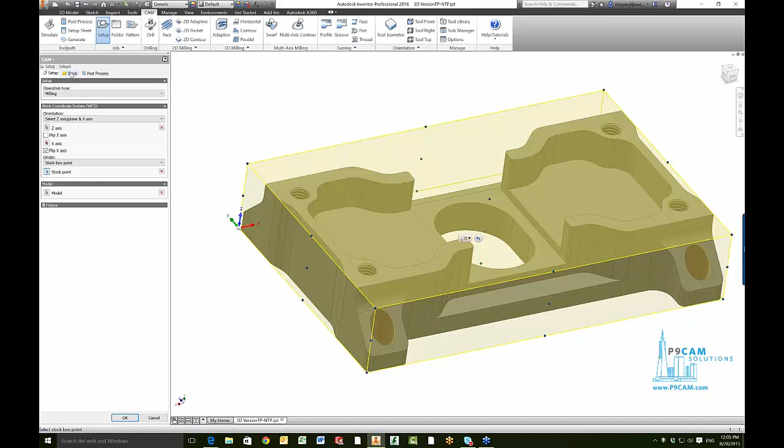But we want to set up our stock. I like how Inventor sets this up where it usually defaults to a fixed size box, and then puts in the values of the minimum size that you need. I usually write these down on a post-it, and then I'll walk out to my shop to see what the next bigger piece is that I have.

So let's assume for today we have a 6-inch by 4-inch bar stock. Or let's say 4 by 1.5-inch bar stock, and we're going to cut it to 6 inches long. And then I want to hold on to the bottom with, let's say, some Mitee-Bite Talon, little vice jaws. So I'm going to offset it to the negative direction by 100 thousandths. Those Talons need about 65, 70 thousandths to hold on to.

In the post-process tab, this is where you would name the program number, and I'm going to put in 'first op' for the first operation - that's just a comment that's going to output. Then I'm going to leave my work coordinate system output to 0. So 0 and 1 equals G54, like on a Haas machine. 2 is going to be 55, and so on and so on.

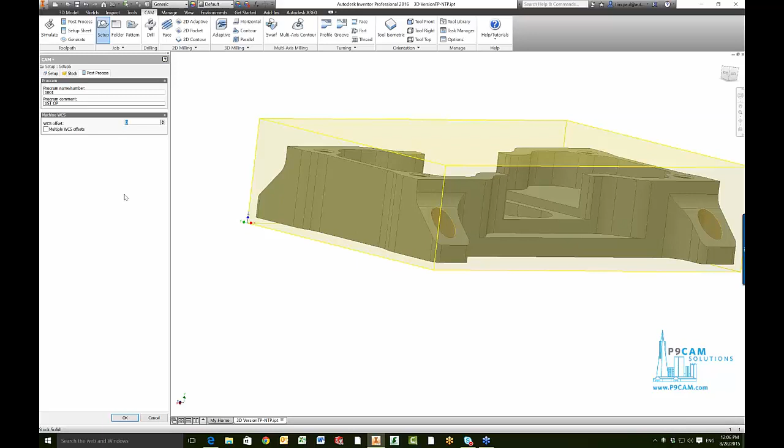So right now we're ready to start adding toolpaths. You can see the representation of the stock and then the model. Always remember that the intelligence of our software is to look at what you want when you're all done and then try to remove the stock that you define. So we define the stock, then define the model, and hopefully all we end up with at the end of the day is the model.

To talk through the setup or operations, generally I'm going to start with making a face operation on this, and then normally I would go in and rough it after that. But with this part, I want to drill these holes so the location is good before I rough it out, so I'm not drilling on an angle. So I'm going to face it.

I think I'm going to drill these holes, and then we'll just start attacking it from there. Quick disclaimer, I haven't spent much time on prep for this, so you might get to experience me working through the part as we would in the shop. Sorry if we get hung up on anything.

The first thing I'm going to do is use my right-click selections in this gray space. I think it's a little more efficient than coming up and grabbing it out of the ribbon up here. So I'm going to go New Operation, 2D Milling, then Face Mill.

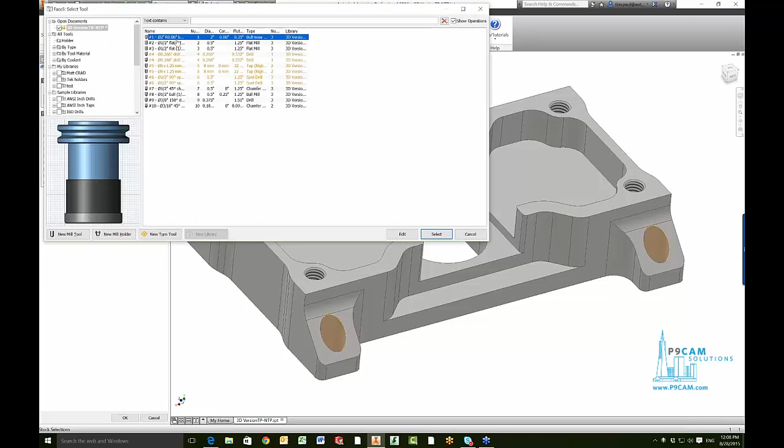We have our five tabs here. I'm going to go to Tools, go through my tools, and grab this Face Mill. Hopefully I should be able to hit OK, nothing blows up on us, and we get a toolpath we like.

So there we go, we got a roughing pass, actually two roughing passes and a finish pass, which is exactly what I wanted. If your default facing operation doesn't look like that, you can go into these tabs, your Heights tab, your Passes tab, and set all these things. We'll walk through that in a bit.

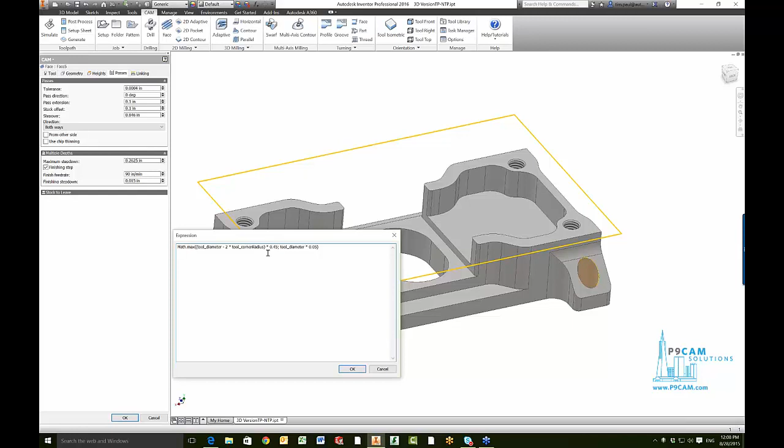An example would be your step over. You can go edit that expression and set it to 45% of the tool diameter. So you set all these things up the way you want, and if it's the type of operation you'll do most in your shop, you right-click on it and make that your default. Then next time you go to face something, it's going to face it the way you set your defaults.

Quick note on templates: a good use of a template is if most of what you do is face aluminum, maybe set up all your defaults for that. Then if you want a special template for cutting steel, you just edit all those settings and store something as your template.

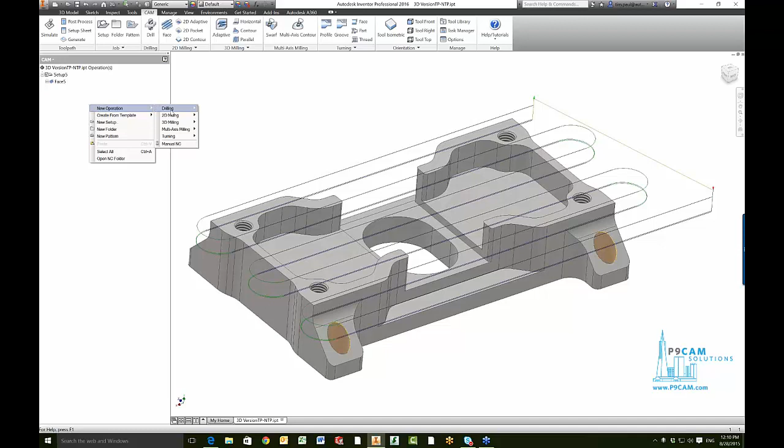So we have a facing operation, and now I want to drill these holes. I'm going to right-click and go New Operation, then Drilling, and go back into our tools. I already looked to see what size those holes were, and they're 375.

I'll click on that, and then we don't have to go to the Geometry tab, we can just grab the geometry right out of here and it'll jump to the Geometry tab. So instead of having to click around all the holes, we could check this box here where it says Select Same Diameter, and that'll run around and grab all the other ones with the same diameter.

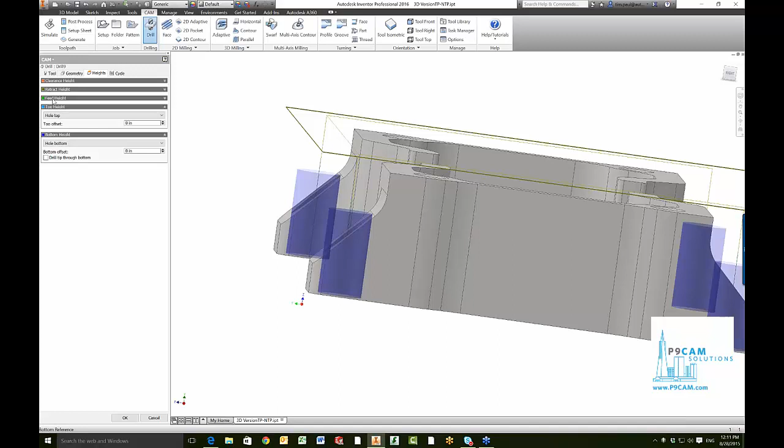Something important to notice is it's rapiding down to here, and then it's going to start drilling, because the default for the heights is that the top, where the cut starts, is set to the top of the hole. We want to change that to be the model top, so now it's going to start drilling at the top of the model because we already faced it down to that surface.

The other thing I want to do is turn on this drill tip through bottom, so it'll take the drill angle and drill tip into consideration, giving you a full diameter in that hole. I also want to drill past that by 30 thousandths of an inch.

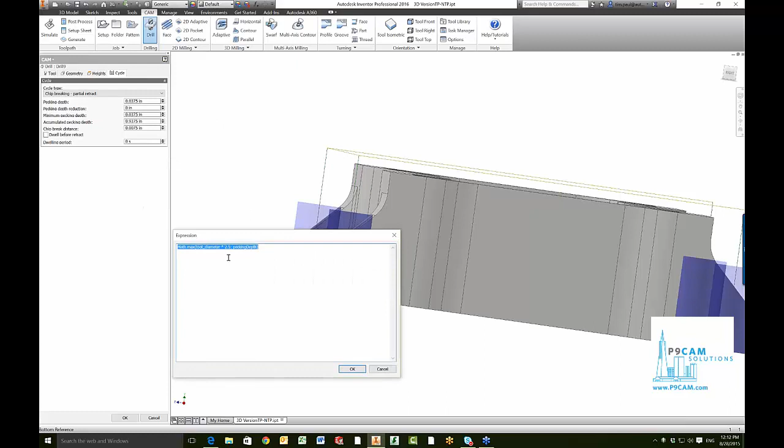Going to the Cycles tab, I really like this chip breaking cycle - it'll take small pecks, but only partially retracting to break the chip, and keep going in. This accumulated peck depth is an awesome tool too - if you look at the expression, it'll take small pecks until it gets to 2.5 times the diameter of the tool, then pulls out, removes the chips, and goes back in.

So there we have our drilling operation, and you can see, like I was saying before, you're not rapiding down here, it starts up there.

So now I want to rough the part. I like to use our 3D adaptive as often as possible. A lot of people look at this part and don't really think it's a 3D part, or a part similar to this, but pretty much everything we make is three-dimensional. So it's going to look at how it can rough the entire part with one tool. So turn on this adaptive, go back into the tools, and I think this half-inch tool right here will work.

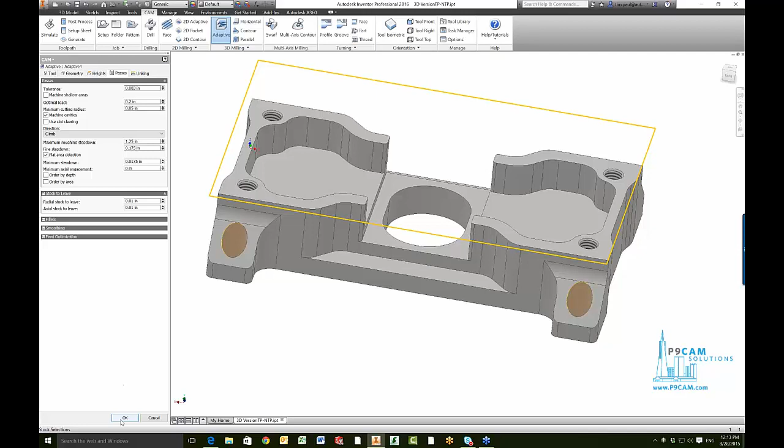So we shouldn't have to make any geometry selections. I do want to make sure that I cut past the bottom, so I'm going to say like 20 thousandths past the bottom. I'll type in negative 20 thousandths from the model bottom. I want to make sure the top of the cut starts at the model top, and it's already set up that way. Looking at the passes tab, I shouldn't have to change anything. So I'm going to hit OK. If I don't like something, we can always go back in there and edit it.

So at this point, before I get too far, am I running ahead of anybody, or does anybody have any questions? Okay. Well, I'll keep talking until somebody stops me.

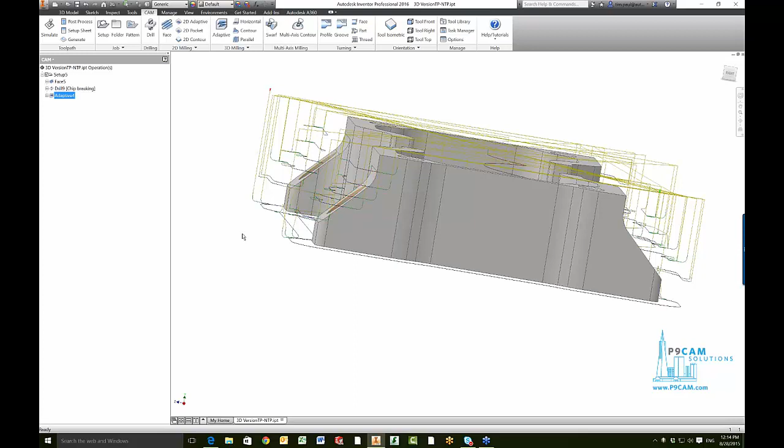So right now, it calculated that adaptive toolpath. If you can see, it looks inside and outside the part, and it helixed all the way to that bore. It roughed all these open pockets, and it even made these step-down passes on these feet, or these little angled areas here. So now we can go in later with a ball mill and get that in one setup instead of having to turn it up on its side and side mill it.

Sorry I didn't do any more prep on this. I just want to think through the part as I would be doing it in the shop. So right now I would probably simulate it, get a feel for where I'm at.

Always when you're simulating, I turn off toolpaths, turn on stock, and most of what I care about is making sure my tool's not colliding with anything. So I turn on stop on collisions. Maybe we picked a tool that didn't have a long enough flute and it'll stop there, or maybe we didn't have the tool hanging out far enough and the tool holder crashes into something. I usually don't spend much time watching the toolpaths move around, so I'll speed it up. Mostly what I'm looking for is an alarm that pops up saying, hey, you got a crash.

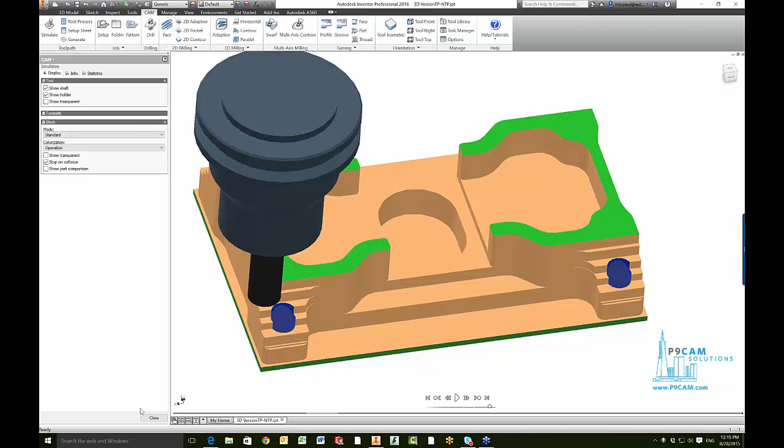Next thing I do is look around the part, make sure it's what I was intending. And this is what I intended. I knew this was going to still be roughed out, but I wanted the whole part roughed out, and the only thing that's finished is this top surface here because we had a finish pass on that facing operation. So that looks good to me. Now I want to go in and finish, because in our adaptive toolpath, on the passes tab, we had stock to leave turned on. So we left 10 thousandths radial and 10 thousandths axial stock to leave.

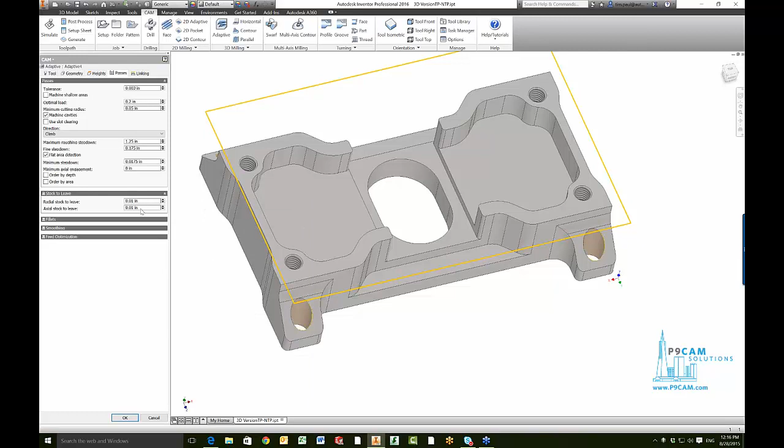So now I want to finish the floors and I want to finish the walls. Now we have a lot of surfaces. We have these surfaces to finish on the floors, and we have all these walls to finish too. There's always a few ways to do anything. If we look at new operation, 3D milling, we could use this horizontal toolpath, which is a really awesome toolpath.

Actually, looking at the time, I think we have some time to just show you what that toolpath is. It's not the final toolpath I'm going to use, but we should actually just be able to hit OK. What this will do is go in and finish all your horizontal surfaces really efficiently. And that's a good toolpath. You can see it took just a few mouse clicks and you got all these horizontal surfaces finished. We could raise up the top definition and also finish the top here.

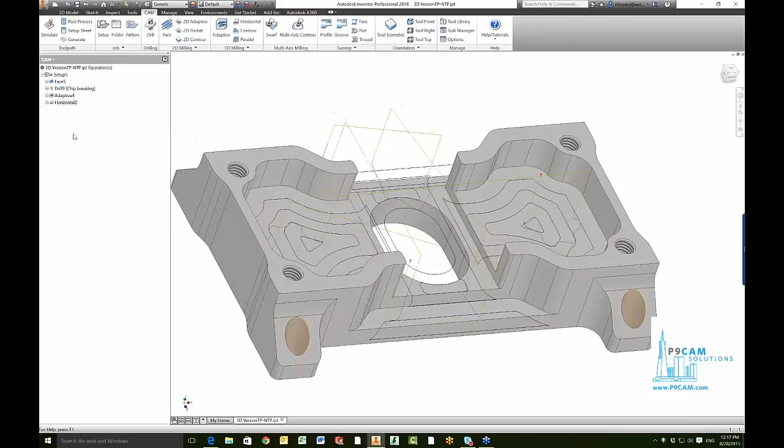The only thing to remember with that is that the walls are not finished with cutter compensation. So if you want to change the dimensions on this with cutter compensation, you won't be able to do that with horizontal. So we have a really good tool in 2D milling, 2D pocket. I'm going to select the 2D pocket, and I want to use the same half-inch tool.

And I'm going to just run around and grab all these horizontal surfaces. Make sure I grabbed everything. Yeah, so I grabbed all these horizontal surfaces, and what I'm going to be able to do there is if you look at the passes tab, we have a finishing pass, and we have wear compensation turned on. So we have no stock to leave turned on. So what this is going to do is it's going to give us a floor finish and a wall finish on all those surfaces.

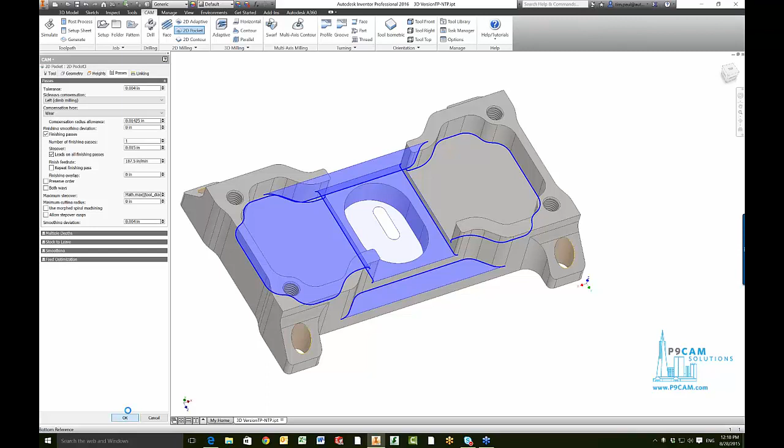If you look at maximum step over, we can look at the expression on that by right-clicking in that white window and look at the expression. So the tool is going to step over 45% of the tool while it's roughing or finish machining all those horizontal surfaces. Let's give that a second to calculate, and you can see pretty efficiently you can finish the floors and the walls on all those features with just a handful of mouse clicks. So it's an awesome tool. I loved it when I found it. So I hope you guys can use that too.

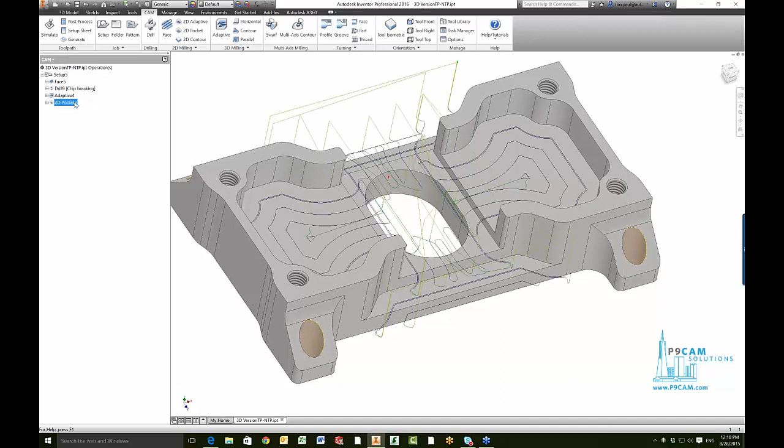So the next thing I think I want to do is I want to finish the walls on this bore and probably on the profile of the part. So I'm going to right-click in the space, new operation, 2D milling, and I'm going to use a 2D contour for this. So it defaults to the same tool I've been using, which is what I want to use. I'm going to select this outside line to get the profile, and I'll select this line here to get the inner profile.

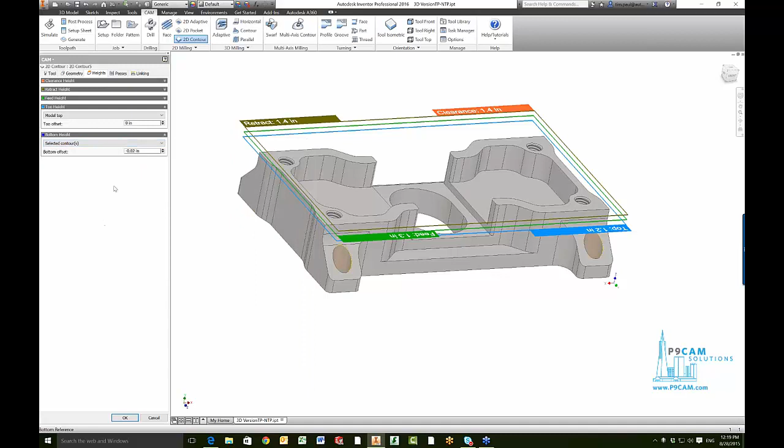So I'm going to go to my Heights tab, and I want to go 10 thou below the contour. So because we selected a contour, it defaulted to this. I could also say to the model bottom minus 10 thou, but in this case it's the same thing. If I go to the passes tab, my wear compensation is turned on, so we're ready to go on that. So just kind of spin it around, make sure the toolpath is what I want, and it is. So I got a finish pass around the outside and a finish pass on that bore.

So I think let's do a 3D toolpath on these feet here. I think that's what we'll do next. So normally I would save it here, but let's get in. So I'm going to right click here, new operation, 3D milling. So you have a lot of toolpaths to choose from. I think what I'm going to use here is a scallop. So bear with me if we end up having to make some adjustments on this, but you'll kind of see how I would think through the operation. So the first thing I want to do is grab a ball mill. So I have this half-inch ball mill that I think will work for that.

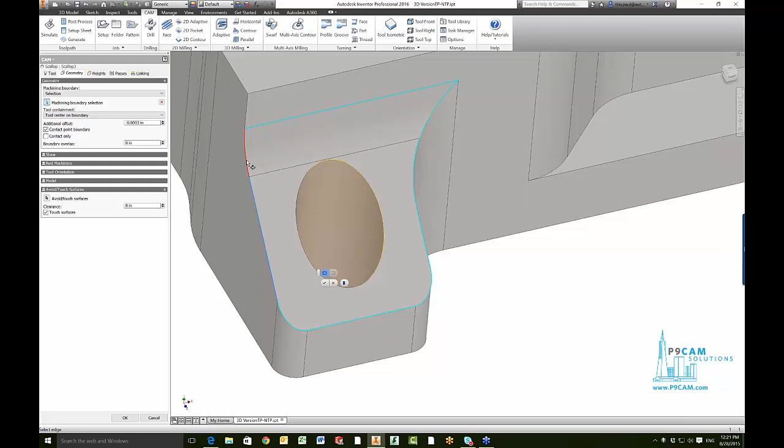Next thing we're going to do is go to geometry selection. So I want to set a machining boundary to this area here. And if that works, then I'll go around and do it everywhere. So it's kind of an important detail. I'm going to zoom in. So when you just hover over this, it's not really the whole area that I want. So if you click on it and then click on it again, it opens up this option here. So now you can go hover over this, and I was lucky enough to where it went to where I wanted. Sometimes you do find that you have to chase it around, but there's some intelligence there. So that was easy enough.

I'm just going to do it on all of them. So click here, click again, and then come up here. So click here, click again, click there, hit OK. So click here, click again, come up here and hit OK. Try it here, click again, come up and click there and hit OK.

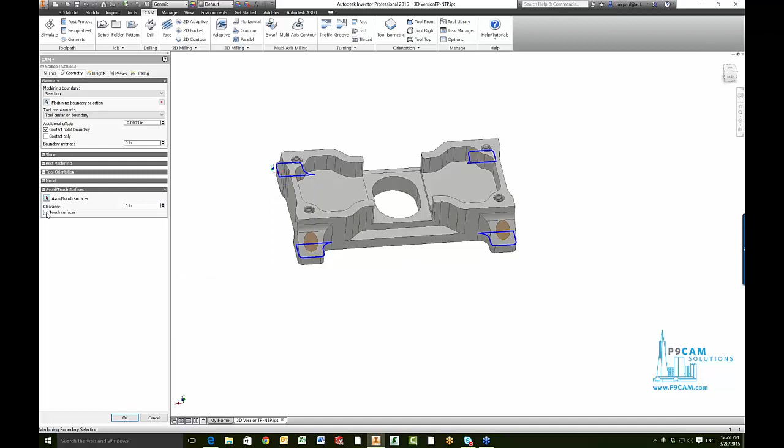So the next thing you want to do is if you go into this avoid/touch surfaces area, I'm going to turn on touch surfaces and make that 0. Now I want to say, now come in and touch these surfaces. These are what I actually want to machine.

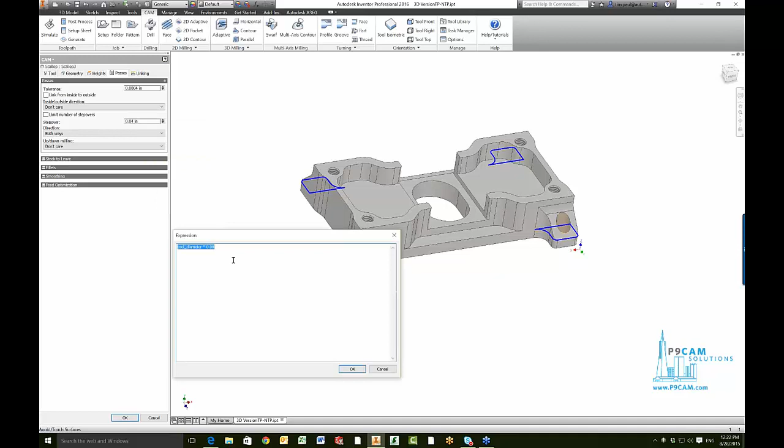Check out our passes tab. Our step over is 8% of the tool diameter. I'll leave that for now. We can edit it later if we want to change the tool path. That's pretty much exactly what I wanted to happen right there.

Cool. So we'll move on to, let's say, drill and tap these holes. I think we're doing good on time to where we'll be able to get over to the back side of this and maybe even do some blind chamfers here. So this is where I use a template. So generally I tap all my holes the same. I might have some different feeds and speeds for steel versus aluminum, but I'm going to use a template.

So pretty much the only prep I did on this part was make sure I had a template for an M8 hole. So this is an M8 threaded hole. So I went in and made a template. So I'm going to show you how to use the template, and I'll kind of go back through and show you how I saved the template. So I'm going to right click in this space and create from template, and then come down to M8, and this is how I label it, but you can label it different ways.

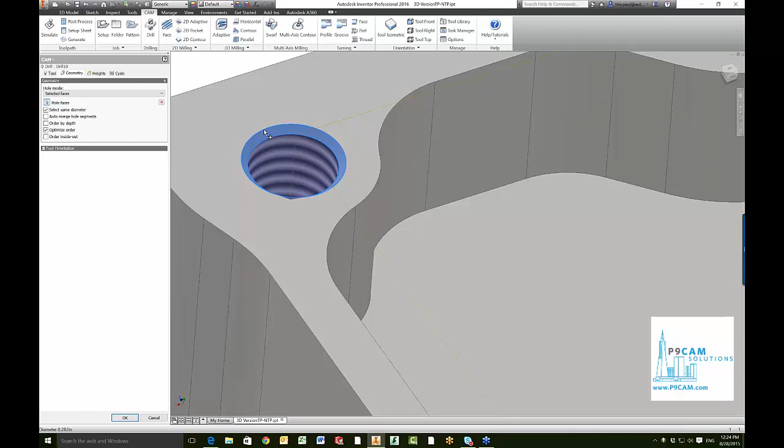And an important note there is if this was modeled at a 90-degree chamfer, if you use, say, a 120-degree spot drill, it's still going to take that 120-degree spot drill and satisfy the major diameter of your countersink hole there. So keep that in mind. It's a pretty neat trick if you don't have to do any math to get the right chamfer diameter. So I'm going to hit OK there.

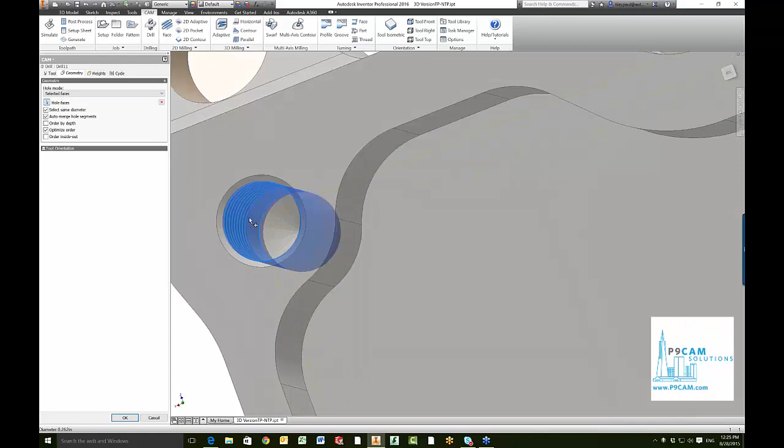And then I'm just going to go select the geometry for these next 2. So for this, I'm going to select the wall. I'm going to make sure I have auto merge hole segments. So if you look down on the bottom of this, it's threaded to here, and then it's pre-drilled, and it also has this chamfer here. If you auto merge the hole segments, it puts them all together. So that's an important little tip. And then it was already set up to select all the same hole diameters. So we're going to hit OK there.

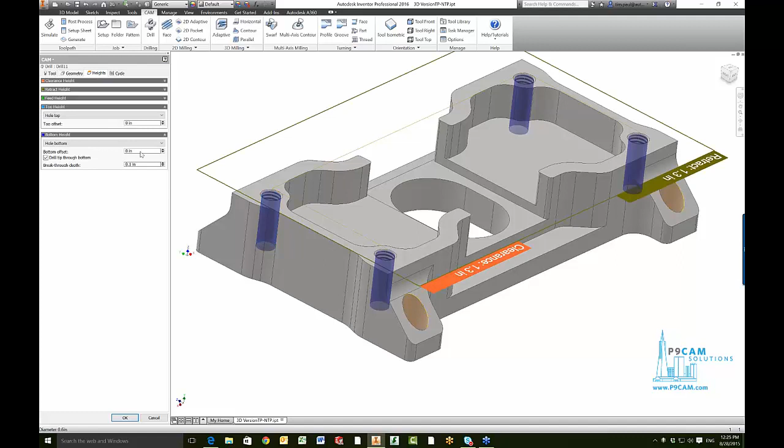Maybe last note is if you go to heights, I have this all set up to where it drills at the right depth. So we'll go here, select that, hit OK. So I did a lot of talking there, but using a template, you could have done that in just a matter of seconds. So I kind of walked you through how I would set each one of those up a little bit. But the important thing is once you get a group of tool operations that you're going to use repeatedly, which is very common, spot, drill, tap, you want to highlight those, right-click on them, store as template.

And in this case, we already have a template in there, but let's say we made a small tweak or a small change, because we rarely get it perfect the first time. So you're going to click on that, and we're just going to overwrite this one. Hit save. It's asking if I want to replace it. I'll just say yes. So that's how you would use a template. I kind of walked you through some of the details of setting it up, and then that's how you're going to save a template as well. So we have spot, drill, tap.

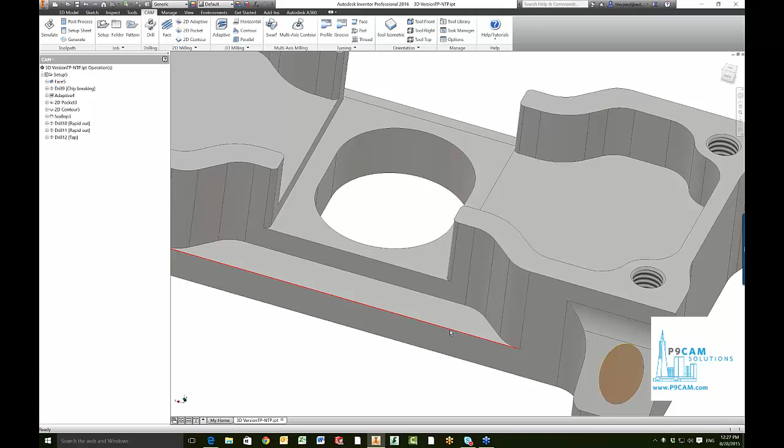Let me think what else is left. I think we're ready to chamfer this part. So we're doing good on time. So I'm going to walk you through how I would do what I call a blind chamfer. So this trips a lot of people up, but it's pretty simple. So again, I do this often, and I do it a similar way. So I already have a template set up, so I'll show you how to use the template, I'll show you how I set up the template, and then I'll show you how I save the template. So I'm going to right click in this space, create from template.

I'm looking for my, here we go. So when I was using HSM as a customer just 5 months ago, my template list was a lot longer. So you'll find that your templates, you'll have a lot of good little nuggets in there. Once you perfect, say a blind chamfer, save it as a template and you'll be able to go back to it real quickly. So here's, it's using a 3/16 chamfer mill. It's going to be a 10th blind chamfer.

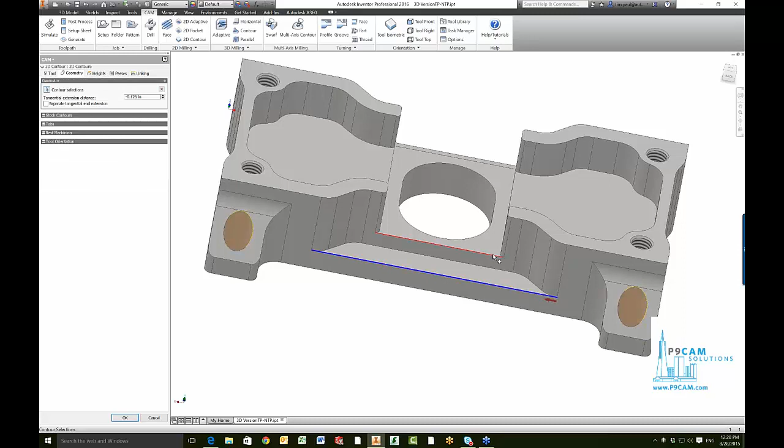What I call blind chamfer is anything like this where it's not an open profile, or a closed profile that goes all the way around something. Right here it's blind, so it kind of comes up against that wall. We want to chamfer this edge without banging into that wall. So if we right click on this and edit it, first I'll show you how easy it is, and then we'll go back and I'll show you what I did. So you just click these edges.

So I'm of the belief that you pay for an expensive CNC machine, you should utilize it to do all your chamfering, and you should try to get as final of a part as you can. So you can see real quick we got all those chamfered. I'll show you how I do that and avoid these walls.

So we pick the tool and we go into geometry, and this is the magic right here. It's really not magic, it's just a tangential extension distance. So if you wanted to pass up this line, you would have a positive value in there. If you want to shorten that line, you'd put a negative.

It's that simple. In your passes tab, you would set up your chamfer width, and then generally on these blind chamfers, you want to use the edge closer to the outer diameter. So you want to have generally as big of a tip offset as you can afford. And then I usually get rid of the radius lead in, so I just come in at a 90. So that's kind of how I would do that.

One thing to note is, if you notice, this has a tight radius, this has a broader radius. The chamfer is going to come closer to this edge if using the same tangential extension distance. It's going to come closer to this edge than this edge. So if we were trying to get in and get real fine with it, we'd want to set up two different chamfers and then have two different extension lengths. So maybe leave this one here, and then this one would be lesser.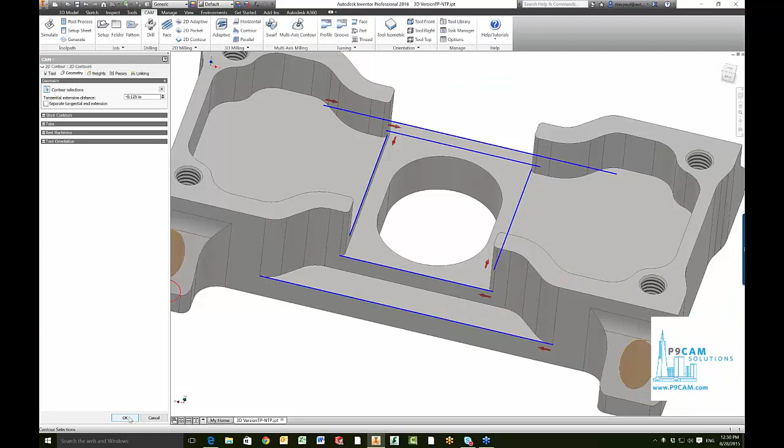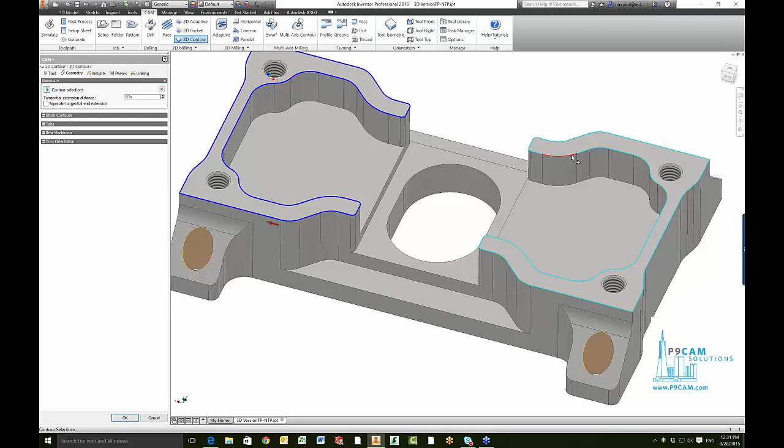So that's the chamfers. I think we're ready to, oh, I didn't chamfer these closed contours, right? So I would do that by right-clicking, going to New Operation, 2D Milling, and 2D Contour. So if this had chamfers that were modeled into it, I'll go over that as well. So in geometry, you just select these edges here and here. Those are all the closed contours.

So if you had a modeled in chamfer, you would just select the bottom edge of the chamfer. And then in the Passes tab, where it asks you for the chamfer width, you leave that at 0. If you don't have a modeled chamfer, you want to put in your chamfer width. It's nice if you have modeled chamfers because you can pick a lot of different size chamfers with one tool operation. If you want different size chamfers without them being modeled in, you need multiple tool operations. So if this was a 20 thou and this was a 10 thou, you'd want two different tool operations to satisfy that. So then we always want to give it a tip offset and hit OK.

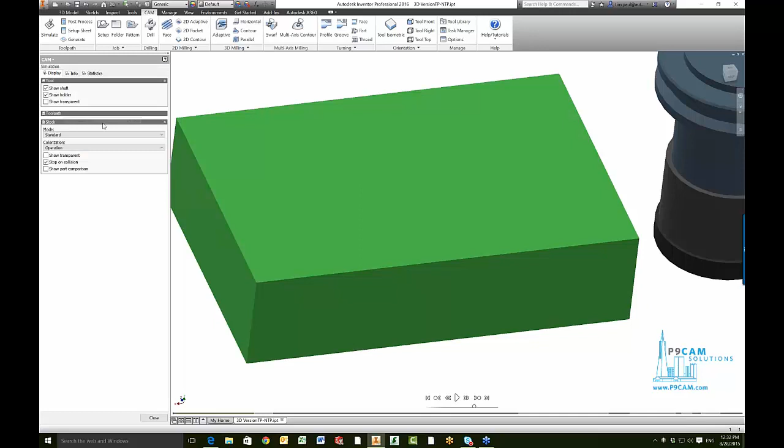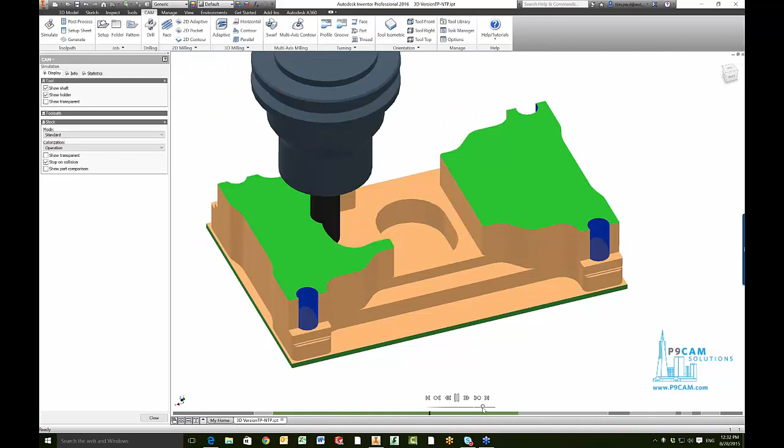So I think we have a done part. I'm going to simulate it, or done first operation at least. So I'm going to simulate this. I'm going to right click on the setup, go to simulate, get this set up the way I want. I always make sure my stop on collision is turned on, and we should be ready to go. So I'm going to speed this up. I'm hoping those angled feet come out the way I intended it to be. If not, we'll go in and make some small adjustments.

Hey Tim, while that's simulating, just a couple questions here. I don't want to throw you under the bus, because I'm not sure if we're going to be able to answer them in the affirmative. But a couple of questions really going around the same thing. So is there a way for us to chamfer the 3D sloped surfaces, and then also the inside of that hole that breaks through, that intersects those sloped surfaces?

Oh, that's a great question. So yeah, I've done that a lot. Usually it takes a little more fudging around. Not fudging around. Yeah, let's talk about that. So what you would want to do there is you would want to model the chamfer in, because really, if you think about it, this is kind of like just a chamfered foot, right? So you would treat it the same way.

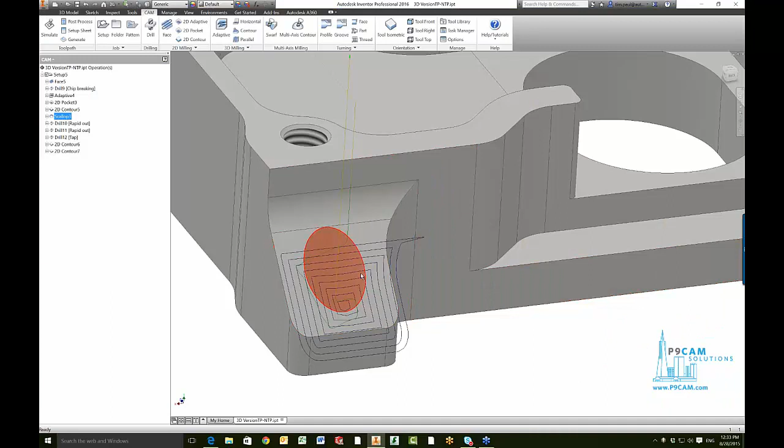I use a scallop toolpath, and that's kind of why I went to this. I use a scallop toolpath for that all the time. So you would just model in your chamfer and do the same exact selection. So you would want to do scallop, do a machining boundary of just the chamfer, and then pick your touch surface as just the chamfer.

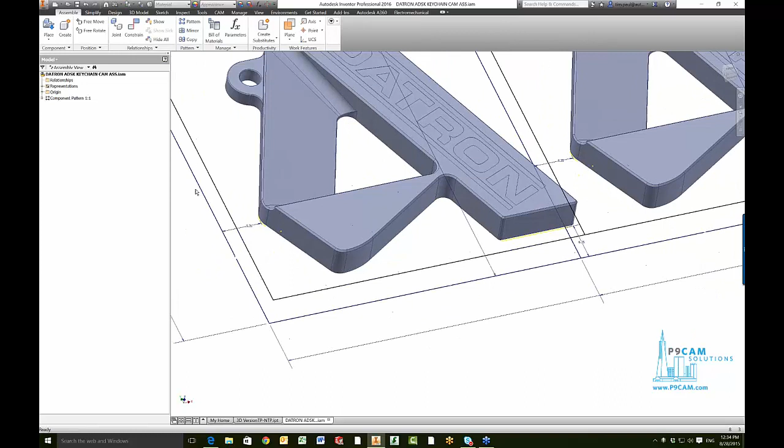So actually, I have an example. If you want to, we can jump over to that real quick. I might fumble around a little bit looking for it, but yeah, that works. And while you're looking for that sample, basically what you're saying is you need to do a little bit of work in the model to get the chamfer surface that you want, and then you just apply a standard 3D toolpath to it. Exactly, exactly.

Just got to remember where I put it. Here we go. So we're doing this part for one of our partners, and we didn't want to put a chamfer mill in the machine, but then we also wanted to chamfer these little 3D edges, right? And then we also wanted to do what you would normally think of as a chamfer mill operation.

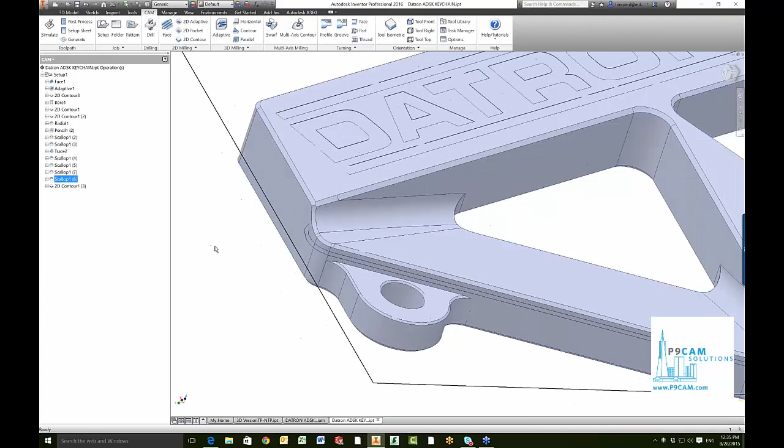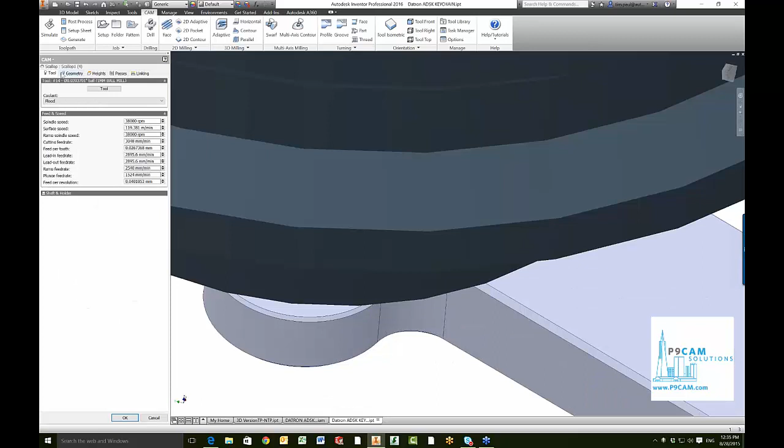We didn't want to put a chamfer mill in the machine, so we chamfered all these edges around here, but also these 3D chamfers. And then we also did these blind chamfers here, but because we modeled it, it was super simple. And we actually also did the chamfer here, so I'll walk through that. This chamfer right here, again, I used a scallop toolpath. In the geometry selection, I did exactly what we did on that foot. I selected here and here, and then chose those as the touch surfaces.

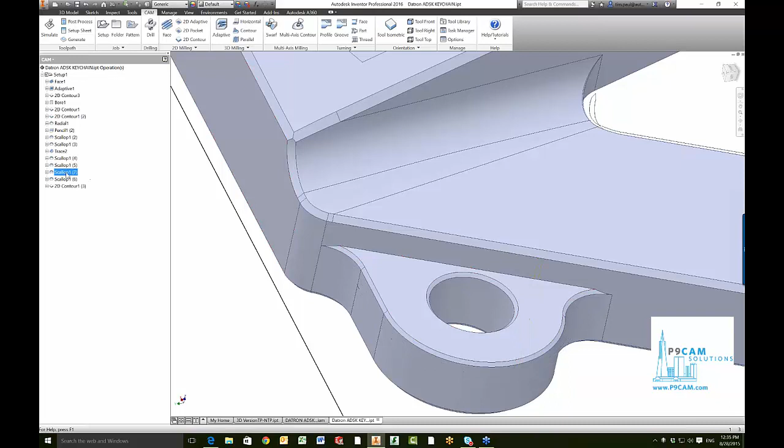This is probably a pretty good example of what you were talking about. We modeled the chamfer in, and let's find that here. Okay. And really the work on this was finding the tool that would fit and make that geometry. So it took me a couple minutes of working through it, but in the end it was really just finding the tool that would do it.

So if we open that and look at it, the geometry I selected was the same way. I just double-clicked, and then chased that geometry around to be all these points here, and it came out pretty nice. So does that answer that question? Yeah, yep, I think it does.

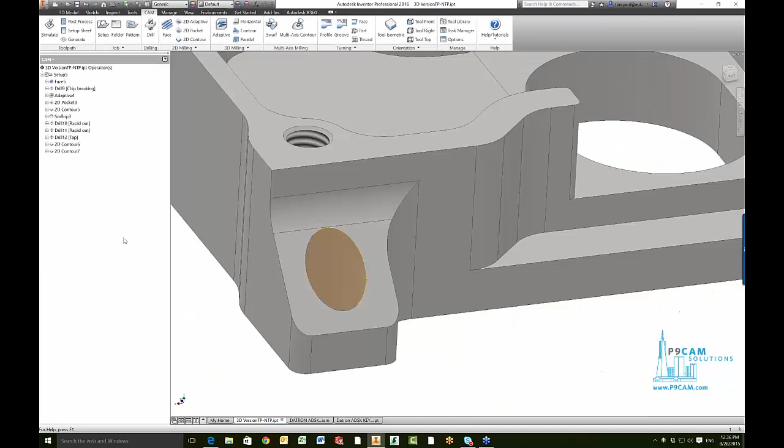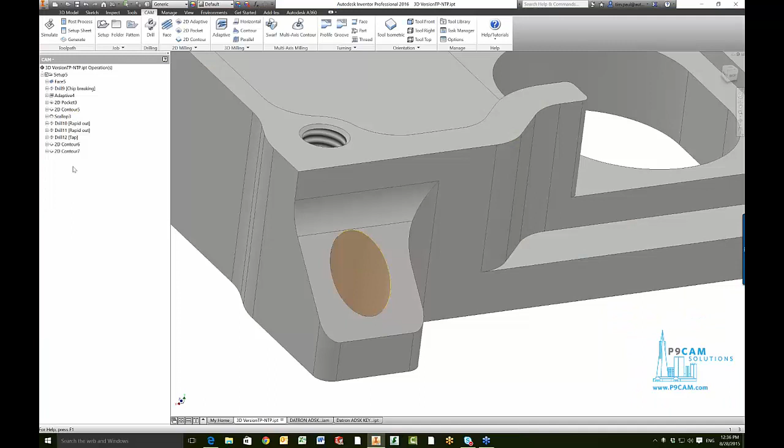I'm kind of avoiding doing it here because you're going to end up watching me look around for a tool in my library somewhere that would chase that chamfer around, and we might have some issues modeling up a chamfer in here. But at my last job, I did that all the time. We 3D machined these feet all the time. I would put a little chamfer here, and we'd run a little ball mill around there in the scallop toolpath. So, all right.

Tim, do you still have the other file? Another one just came in asking if you can simulate, and I think that was based on the other file. Could you just run a simulation? Yeah, of course. This was actually getting made out of a big plate. You want to see it actually moving around, or you just want to see the final? I think we just wanted to see. So this is what the final results are.

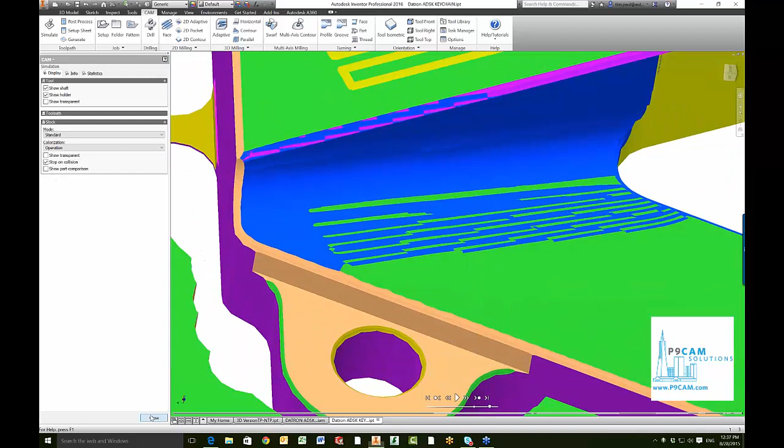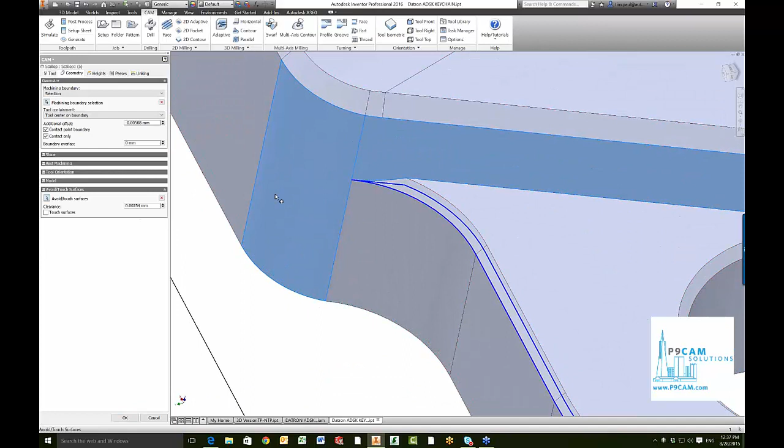Yeah, beautiful. So the nice thing about these blind chamfers is, if we look at this on the geometry tab, I clicked avoid surfaces, so I avoided this surface here, so the tool went up 2 thou away from that wall. So we could make that closer, basically based on our comfort level of how close we wanted the tool to come to that wall.

So it's kind of a good way to do a blind chamfer without having to do that tangential extension in a negative direction. And we're working on some other cool stuff too, so keep an eye out as far as blind chamfers go.

So we're ready for a second operation? Yep. I don't remember... Yeah, so I simulated this already.

So the way I would move over to a second operation on this is, we could definitely do a new setup. I think this is kind of my default behavior, I would start here, highlight that and hit Control D for duplicate.

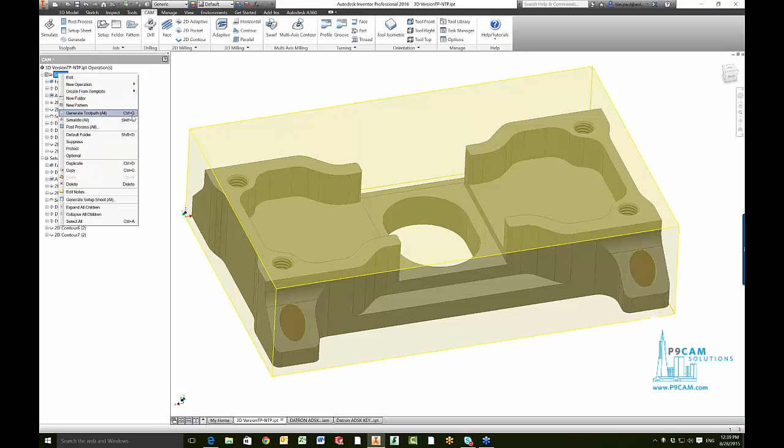If you forget these keyboard shortcuts, just right-click, they're all listed in the right-click menu. So I duplicated the whole job, which might not sound like it makes a ton of sense right now, but hopefully it'll make sense in a second.

So I'll turn the part over, and the way I'm going to hold onto this is I want my XYZ, my work coordinate system, to be set up in the center of the part, but on this surface here. So I'm going to set that on a parallel surface.

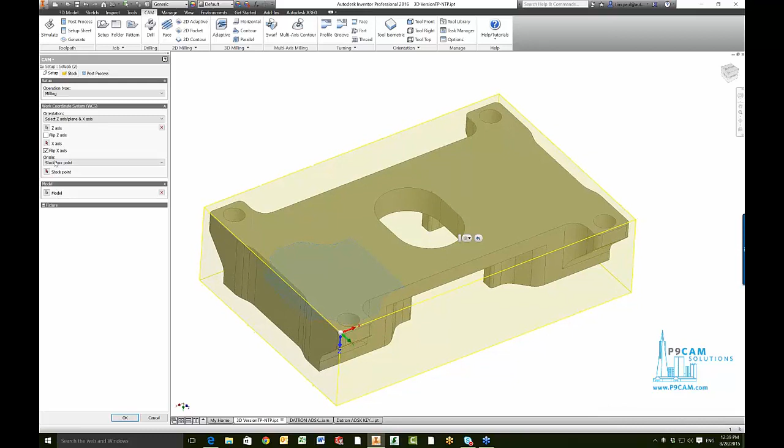So now I'm just going to make some edits instead of going back through and changing a bunch of stuff, so I don't have to select the model. On my Z selection here, I can pick this surface to snap it up to that Z, and then change this origin to go to stock box point.

That kind of snaps these points to a box around the model, and then I can click on that bottom center point right there. That's exactly where I wanted my work coordinate system.

So we'll go over to stock, and the only thing I have to do there is, remember we had 100 thousandths going in the negative direction before, I just need to turn that to positive, so it's exactly how it was before.

And then this is where I would change this to a different part number, and I'm going to call this second op. Maybe call this G55, so call that number 2.

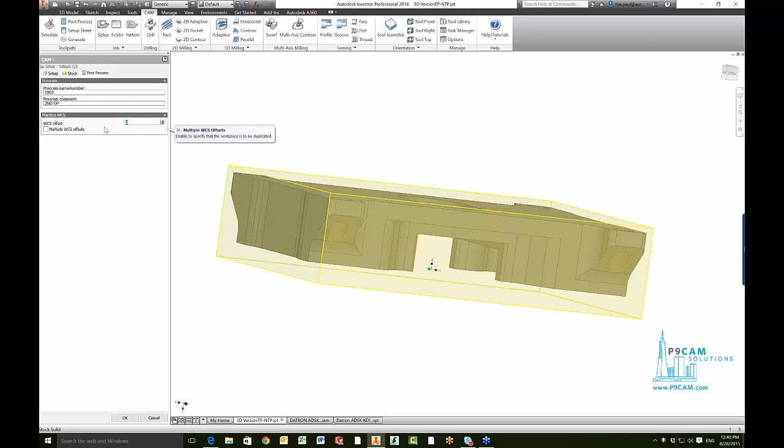So now you'll see everything turned red because something changed and it needs to be regenerated. Well, realistically, all I want from this, what we did before, was this last chamfer. I want to reuse it for these chamfers and the face mill operation. So I'm going to highlight all these and delete them.

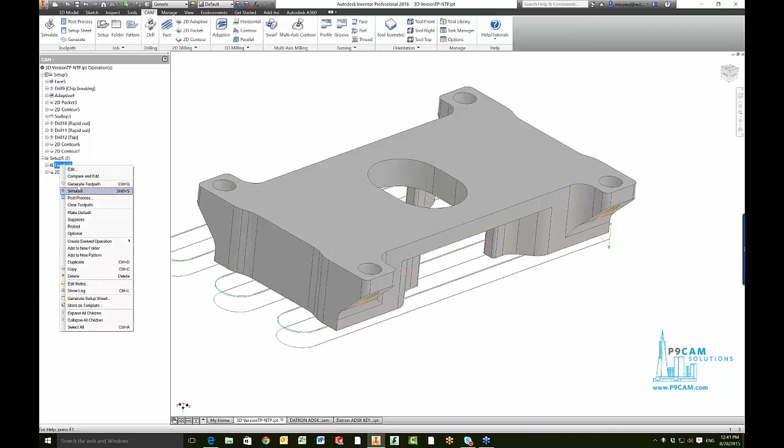Okay, we shouldn't have to do anything other than reiterate the facing operation. So we got the toolpath we wanted for that. And then for the chamfers, we do have to reselect the geometry.

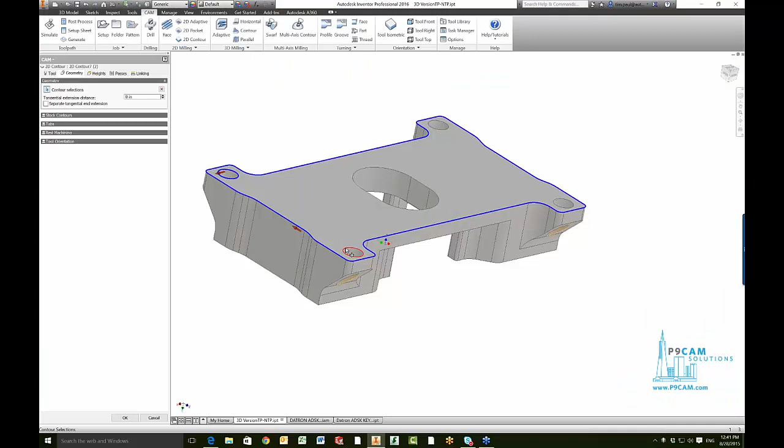So we're just going to X out of the pre-selected geometry and then grab these holes and this bore. Then lock that in, and that gives us our whole second operation should be done.

So this is where I would control-select both operations and go simulate. Again, I have stop on collisions turned on. I'm going to hit play, speed it up, make sure it looks like how we want it to look. So that's the part right there.

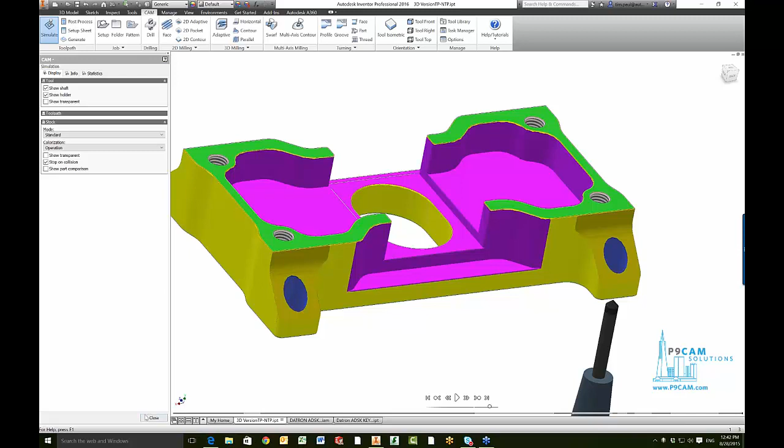Okay, let's see what we have going on here. Okay everybody, well now's your chance. I think we've gotten through that part pretty well. Let's see if we have some questions.

So I have a question coming in from Paula about machine soft jaws for the flip. So I guess that's a question: would you machine soft jaws for this part, or place it on parallels? What do you think there?

Yeah, there's different ways to do it. I would personally probably just grab this in hard jaws and stop up against that stop there. I think that would be a good way to do it, just put that against the stop and then run some hard jaws against these surfaces.

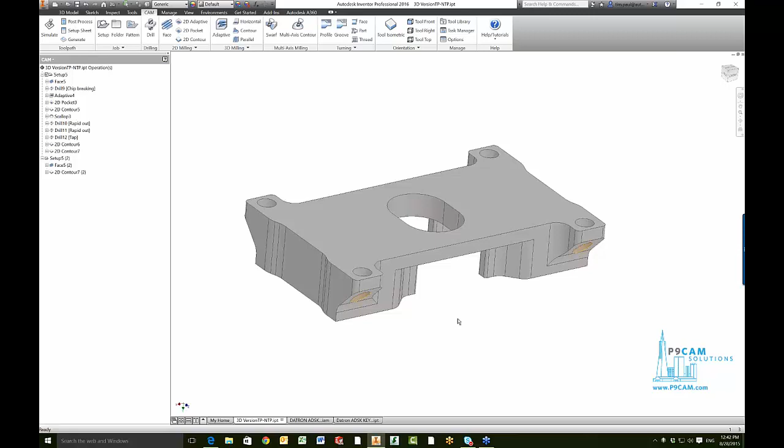Yeah, I think we lost your mic there, Tim. It's suddenly gone really quiet. There we go, how about that? That's better. I took a drink of water and forgot to move it back. Sorry.

Yeah, so honestly for this part I would just put it against hard jaws on these surfaces. Right, we're only removing 100 thousandths of material. We should probably do another webinar that walks through setting up soft jaws on a contoured surface.

Yeah, it's a good idea, and when you've got good CAD like this, parametric CAD, you can use the model to create soft jaws or pockets in fixtures. So I'm going to take a note on that, that's a really good topic for a webinar in the future. So we'll do that, okay.

Let's see, so I've got Michael asking, or says runtime.

So I think what he's referring to there is getting your cycle time when you're in the simulation mode. Yeah, so that's a great question.

Let me actually, I started doing it before I started talking. So I would click both setups and simulate them so I have a full runtime, and then I would go to statistics. So on this part we're looking at 23 minutes and 6 seconds. Now the other disclosure is I didn't look at any feeds and speeds on those tools.

I just grabbed a bunch of tools. So obviously the speeds and feeds will factor into that machine time calculation. As long as you've got accurate speeds and feeds in your toolpaths, it will represent what you'll get on your machine, or pretty close to it. It's not going to simulate tool change time because it's not going to know your particular machine, but as far as machining cycle time, that's going to be pretty close.

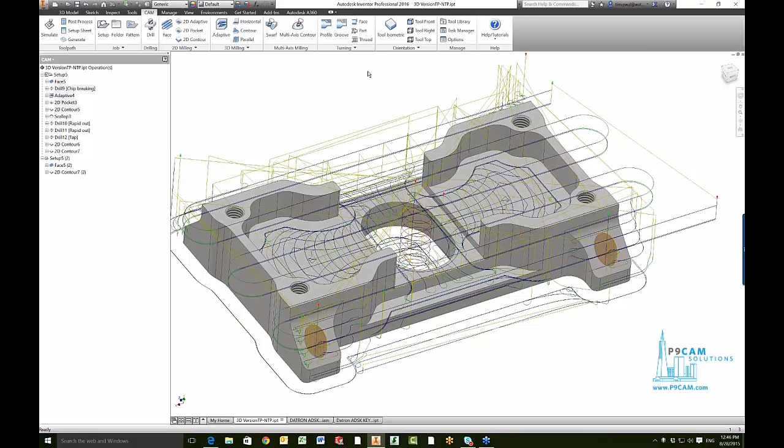So was the question that we're looking for the basically drop-off type stuff that wasn't turned into chips? I think so, so maybe Dustin, if you can follow up. Oh hang on, let's see. I see Dustin's got a follow-up here. So if you use a bigger tool than the corner.

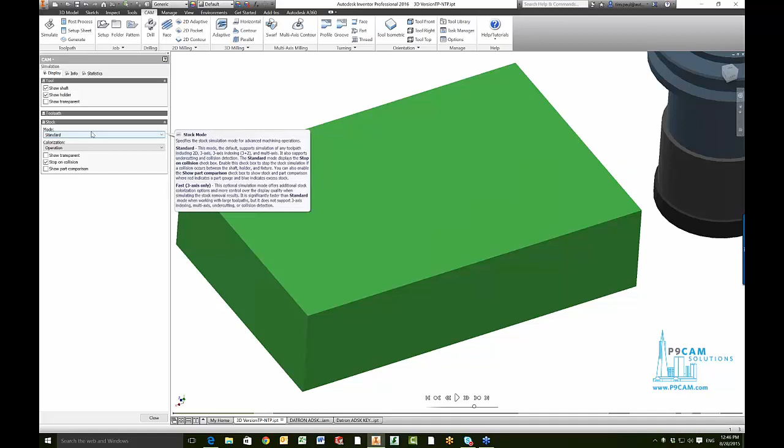Oh, okay, so like a stock compare, right? Okay, maybe that's what we're saying. Yeah, so stock compare. Let's take a look at stock compare because it's a great feature. And then Dustin just typed in yes, that's what he was talking about. I might have to fudge something. So let's run through this and then we'll do a stock compare.

I use it all the time on our HSMWorks, and I have to say I might not have used it here yet. So this is a good example. So these little blue areas are areas that essentially have a little bit of material left in them. As I was saying before, I didn't do a lot of prep on this. I would have to go back and see what the issue is, right?

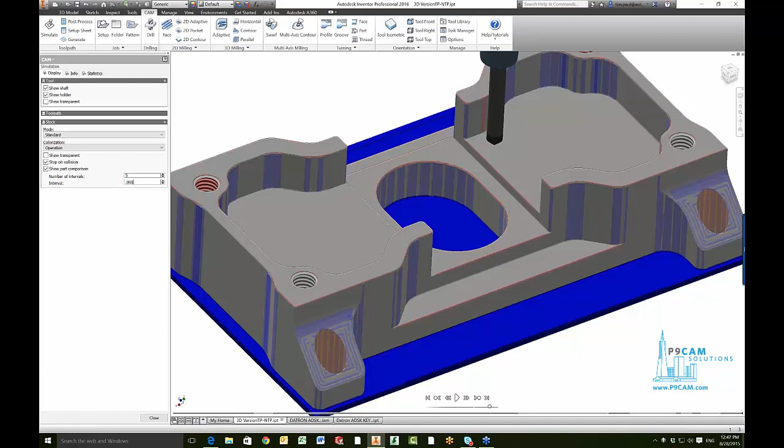Well, Mike and I did some work on this recently, Tim, so I wouldn't start playing with the numbers yet, but you see those two numbers. We need to do a little bit of experimentation, but those are basically tolerances, so you can edit those, and I haven't come up with the exact correct combination yet, but that's basically the tolerance of your model, and then showing a compare.

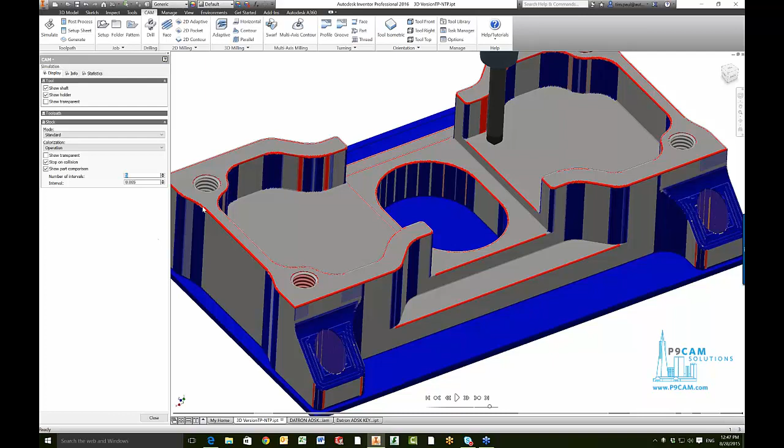So it starts off kind of loose so that the processing time is quick, but you can tighten it up faster. Gotcha. And you can see the chamfers, it's actually seeing that as a gouge right now because those chamfers were not modeled in. Yeah, and then vertical walls are always a little bit tricky in compare. So you've got to get just the right combination there to get your compare just right.

I mean, right now, when you're seeing a little bit of light blue, that's telling me that's just in the tolerance zone, that there's no real error there. The dark blue, obviously, is where material has been left. So yeah, that's your compare.

My thought on that real quick, just kind of talking it through, is that we also have, that's probably considering this here. So on those finish passes, our default tolerance was 4/10,000ths of an inch, and I'm feeling like if we change that to 2/1000ths, made it bigger, I'm willing to bet that those... I'll have to play with that more.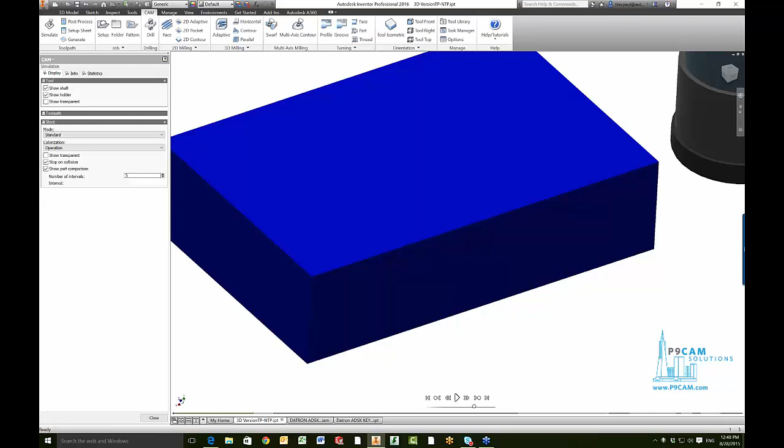I haven't spent a ton of time on it. I'd almost bet those would get darker because it's possible. Well, any 3D toolpath actually has a scallop height to it, right? It's just a question of how close you tune it in. Yeah, so that was good.

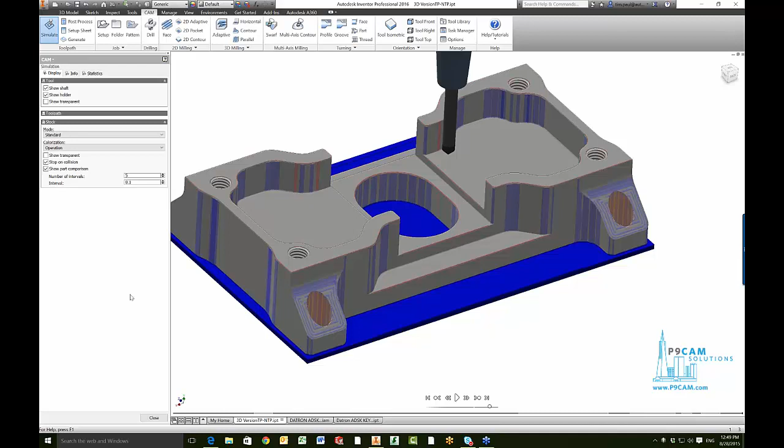Question from Paula: can you redo the feet in a way that the angle of the end mill can be related to an edge, an angled edge? Are you talking about, Paula, setting the part up at an angle and then just coming down and cutting those with a flat end mill?

No, change the machining angle. Let me read that again. I'm not sure I understand the question yet, but I'll read it out in case you catch something I don't. So: can you redo the feet in a way that the angle of the end mill can be related to an edge, an angled edge? Change the machining angle for aesthetics.

A couple other people are saying I think he means multi-axis machining, or more of a planar path. So I think what we're talking about, Tim, is setting the part at an angle so that either the side or the bottom of an end mill can just come and skim that face.

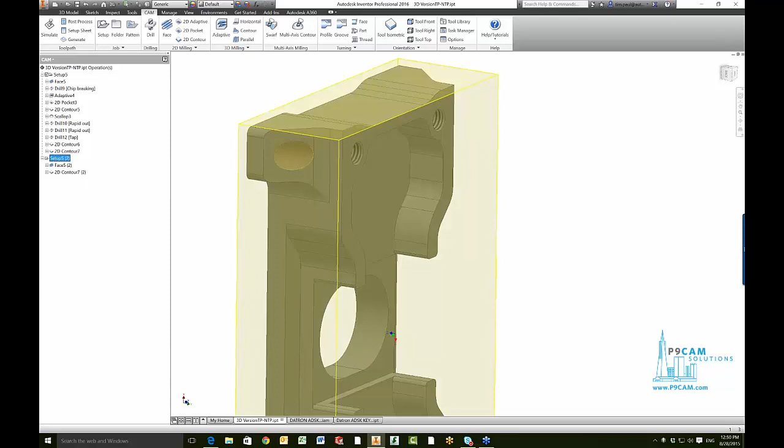Oh yeah, yeah, yeah, so that would be just another job setup. Talking like to side mill these feet. So I just copied that job, and we'll do a kind of quick and dirty version.

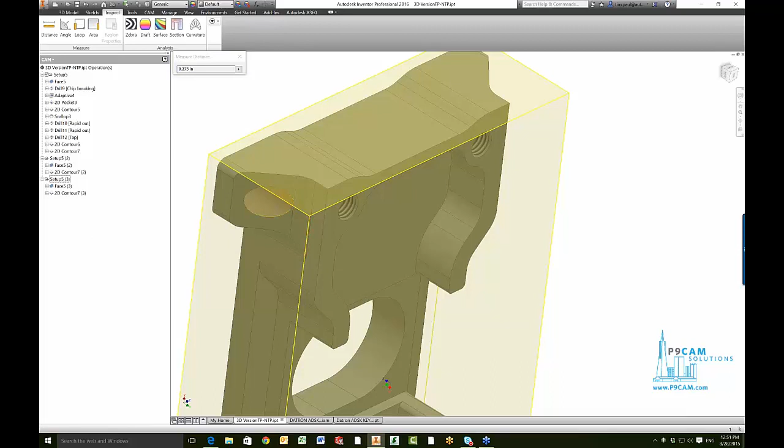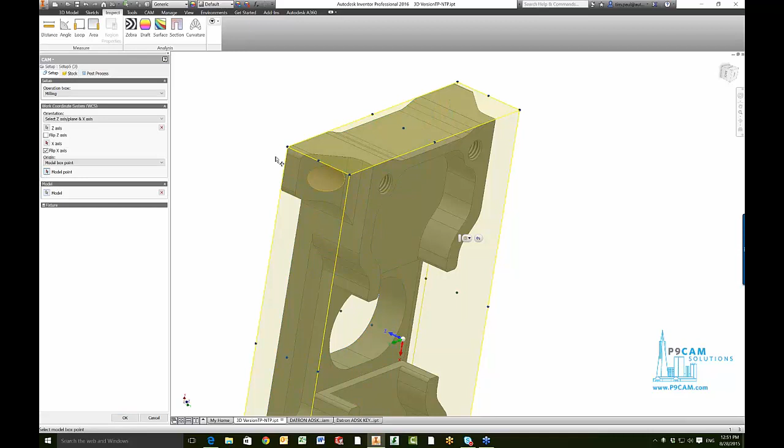First thing I'm going to do is, our radius for this is 275, so I should be able to take that same half-inch tool and run it through there. Let's go do another setup. I'm going to do relative box size with no additional stock, so I'll just make a material just big enough to get around there, and we'll call that point. We'll call our XYZ0.

So hit OK, get rid of both of those. Then we need to make sure this is our default folder. So I could hit Shift D, and that's the folder we're working in now.

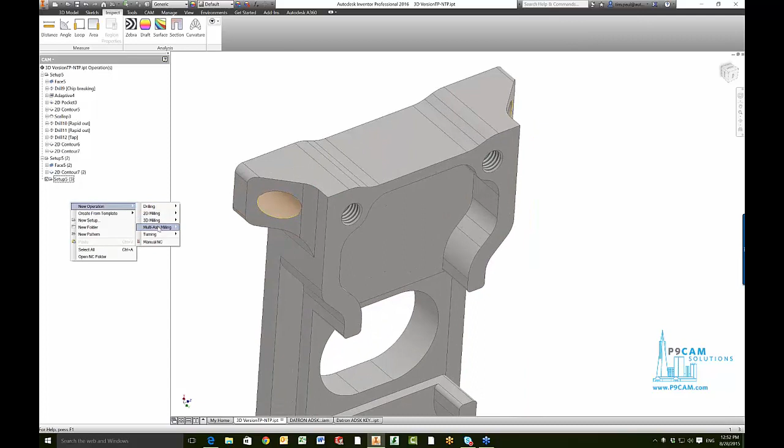Let's do a new 2D milling, 2D contour. We'll grab that 1/2 inch tool. Go to geometry selection, and then I'll pick this, pick it again, and select an open contour. So I'll pick these here. I'm going to deselect that. Actually, I'll hit no, I don't want that.

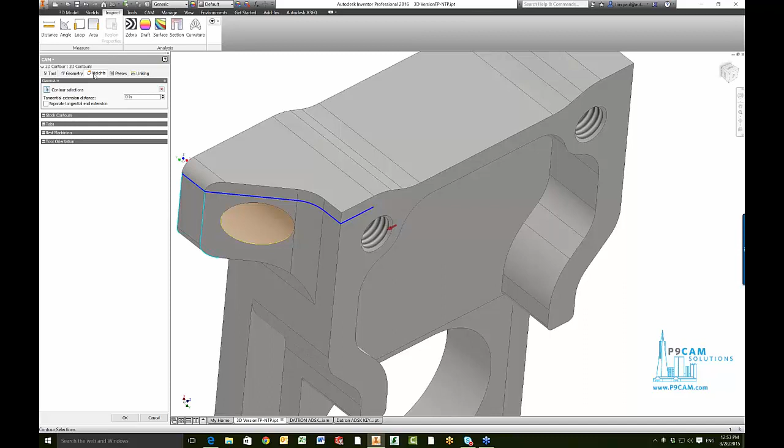So hit OK, and then for the heights, you just set your selection to be this deep, and it should be able to hit OK. Is that what we were talking about? And I'll run through that.

So the issue there, not really an issue, but that adds two more operations. You're going to have to do it there and then flip it over and do it there. Yeah, so I think that answers that.

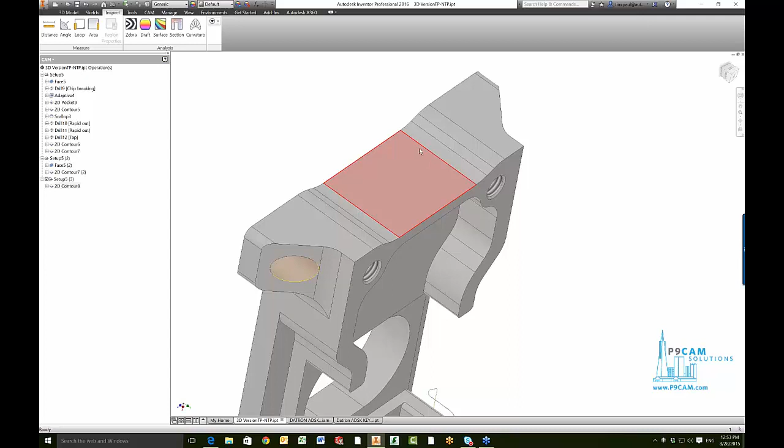We're actually working with CG Tech right now. So I guess the quick answer to the Vericut question is we're working with them right now, and I think pretty soon we'll have something. I was just with them on Monday and Tuesday, and we want to start partnering up.

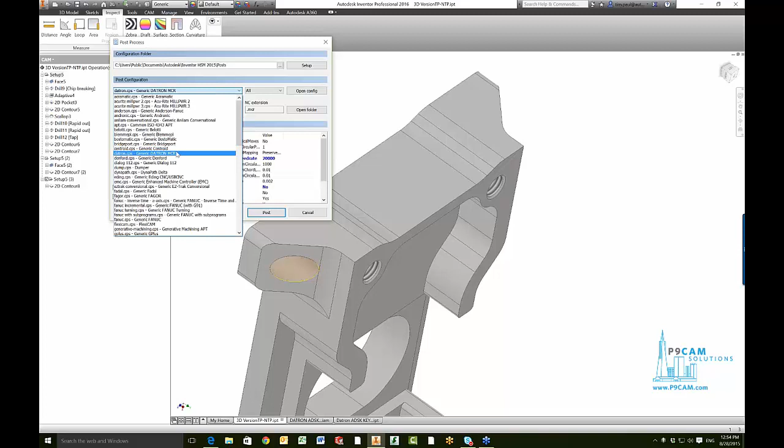Right now we can post out to CAMplete. So we treat it like a post. You just go into post, and your post processor would be CAMplete. I really don't know my alphabet. So then it dumps out the part, the tools, everything needed for the third-party verification. All right, sounds like we've got that coming for Vericut very soon.

Also a question from Bob: do you support wheel cutters and undercut milling with a wheel cutter?

Maybe I'm not clear on what a wheel cutter is. Is that like a slitting saw or something like that? Key seat cutter? Yeah, key seat or slitting saw. Slitting saw, yeah, sure. So the two toolpaths that we support that with right now, one is going to be the horizontal. So if you say this surface here had an undercut, you could use horizontal, and it'll make step overs, and then it'll go under and then come out and retract.

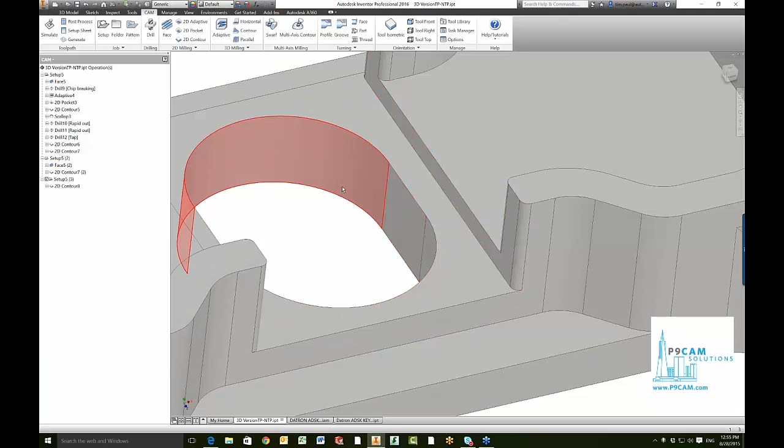And then 3D contour is the other one. So you can do some lollipop cutting and things like that, and also key seat cutter or slitting saw you can do with 3D contour. Right. As far as adaptive goes, it's something our development team's working on, to be able to do an adaptive cut with a key seat cutter. It'll do it now. It just has a habit of retracting while it's still under something.

Right. I've had to in the past just write a little G-code line there that just moves it out from under the slot and then retracts first. Right, and of course you could always drive a key seat cutter along any 2D geometry. Exactly, yeah. So that's the easy one. You can definitely just do a 2D contour, and it'll do that easily.

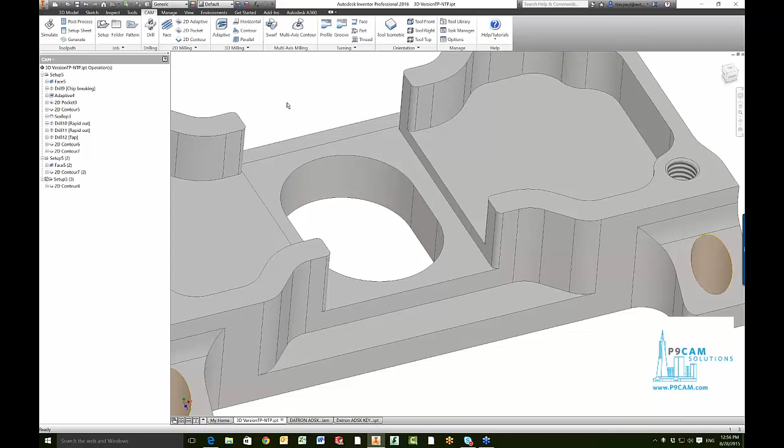Bob's asking, can you execute a contour with the slitting, kind of like flowline in Mastercam? Something like this, or I wonder if that was the 3D contour that you were talking about. Yeah, so our 3D contour tool supports undercutting with like a lollipop cutter. It's probably where I would see it most, with a slitting saw or something like that. I haven't done it, so I don't want to sign up for it if I haven't done it, but we can definitely do some undercutting with a lollipop with our 3D contour.

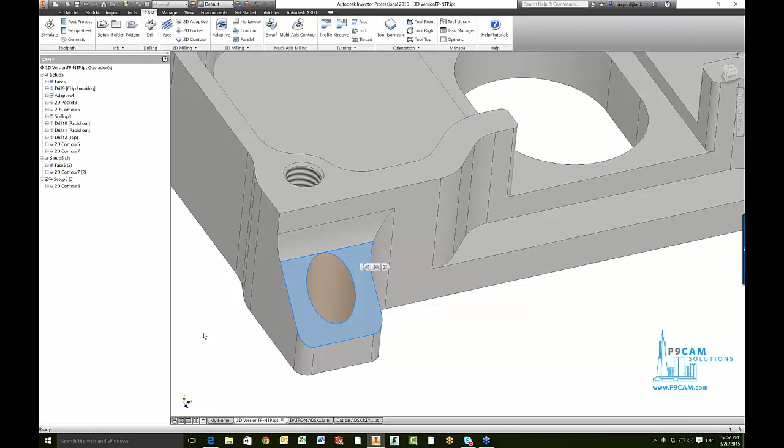And then the question is, when is Flow being implemented in Inventor? I'm not sure. Do we have a date on that, or any good info on that yet, Tim? Well, I hate to sound like a lawyer, but as a public company, I think they're hesitant to throw out a lot of dates on things for some legal reasons. But one of the things I'll show you now, we're working on it. I've played with it. I'm trying to see if it's in beta mode.

So if anybody wants to play with features that are kind of being worked on in the background, if you go into this gray space and hold Shift and Control and then right-click, you can come down here and turn on beta mode or turn it off. Beta mode is stuff we're testing, stuff we're letting other people test. A lot of it's working toolpaths, but you definitely need to use the beta tools with caution. So the reason I did that is I wanted to see if it's in yet. So I went to 3D. I don't see Flow yet, but it's definitely something that's being worked on.

The reason it's not like what we have in HSM Works is that they've been improving what was in HSM Works. I think people are going to be super happy with it. We have morph, flow and some other cool stuff, and that's kind of the foundation for pretty much any 5-axis toolpath. Okay, so not quite there yet, but it's one of the top priorities of our development team, and it's coming very soon.